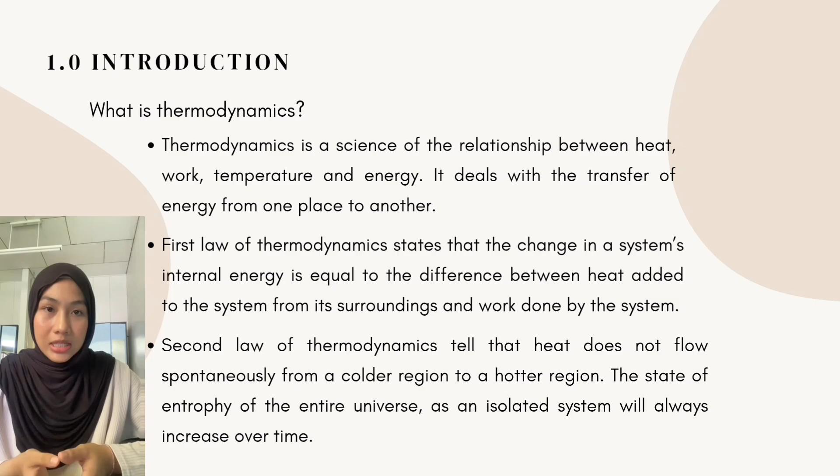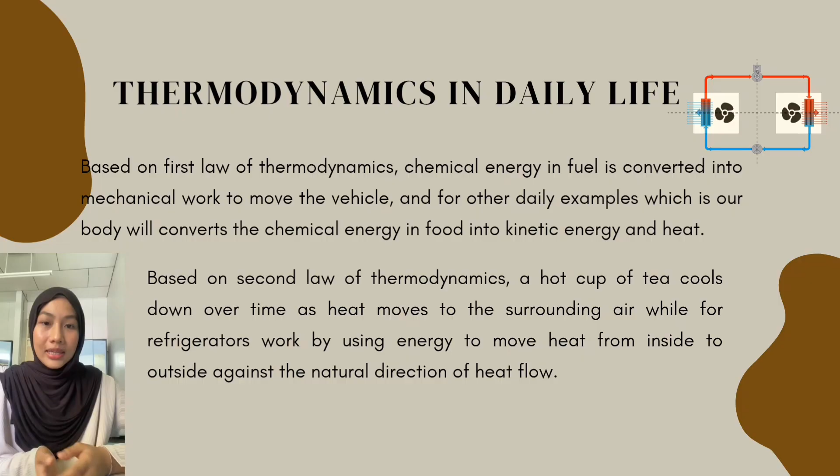So what is thermodynamics in our daily life? For the first law, chemical energy in fuel is converted to mechanical work to move vehicles, and another daily example is our body, which converts chemical energy, the food, into kinetic energy. For the second law, a cup of tea cools down as heat moves to the surrounding air, while the refrigerator works by using energy to move heat from the inside to the outside, against the natural direction of heat flow.

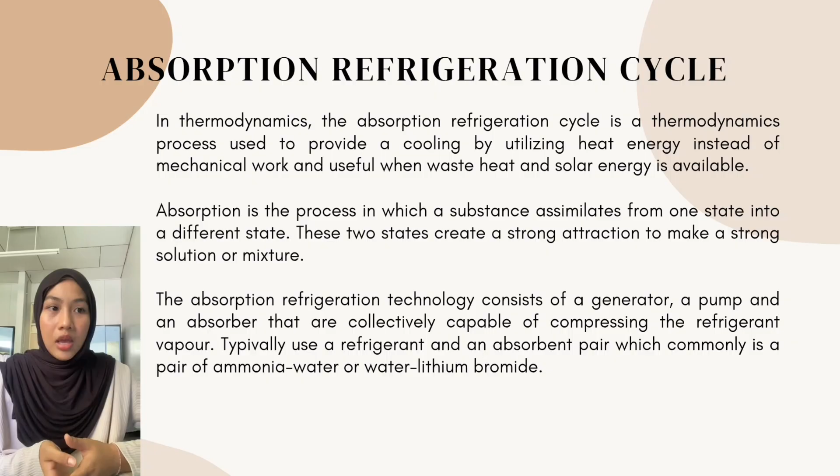Absorption is a process in which a substance assimilates from one state to a different state, and these two states create a strong attraction to make a strong solution or mixture. The absorption refrigeration technology consists of a generator, a pump, and the absorber that are collectively capable of compressing the refrigerant vapor. Typically, they use a refrigerant and absorbent pair, commonly ammonia-water or water-lithium bromide.

The absorption refrigeration cycle in thermodynamics is a technology introduced to address a serious issue. It utilizes thermal energy rather than mechanical work to drive the cooling process. It involves the refrigerant and absorbent with heat from a low-grade source, causing the refrigerant to evaporate and condense. The absorption refrigeration cycle has low energy consumption, as absorption cycles typically require less electrical energy than the traditional vapor compression cycle.

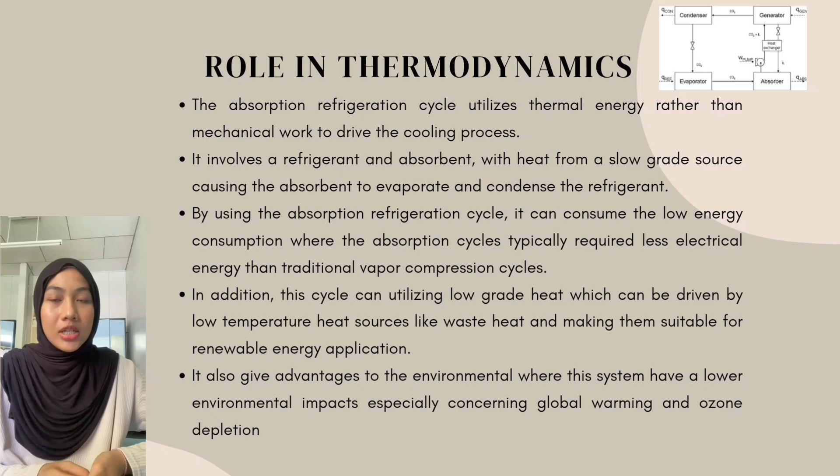In addition, this cycle can utilize low-grade heat, driven by low-temperature heat sources like waste heat, making it suitable for renewable energy applications. It also gives an environmental advantage, where this system has a lower environmental impact, especially concerning global warming and ozone depletion.

Process of the absorption refrigeration cycle. Usually, in the absorption refrigeration cycle, we use ammonia. Ammonia is a refrigerant that gives the cooling and refrigeration effect. Then water acts as the absorbent. Water has a strong affinity towards ammonia, so the ammonia-water solution is formed and used to run the vapor absorption refrigeration process. What is refrigerant? Refrigerant is a heat carrier fluid with latent heat properties to increase performance.

The first process for this system is evaporation. The low-pressure liquid refrigerant enters the evaporator, where it absorbs heat from the surroundings and evaporates. Then is absorption. In this stage, the refrigerant vapor coming from the evaporator is absorbed by a liquid absorbent. Next is condensation. The refrigerant vapor, after being separated in the generator, is passed to a condenser where it loses heat and becomes a liquid. Lastly is expansion. The high-pressure liquid refrigerant from the condenser passes through an expansion valve or throttle valve, dropping its pressure and temperature.

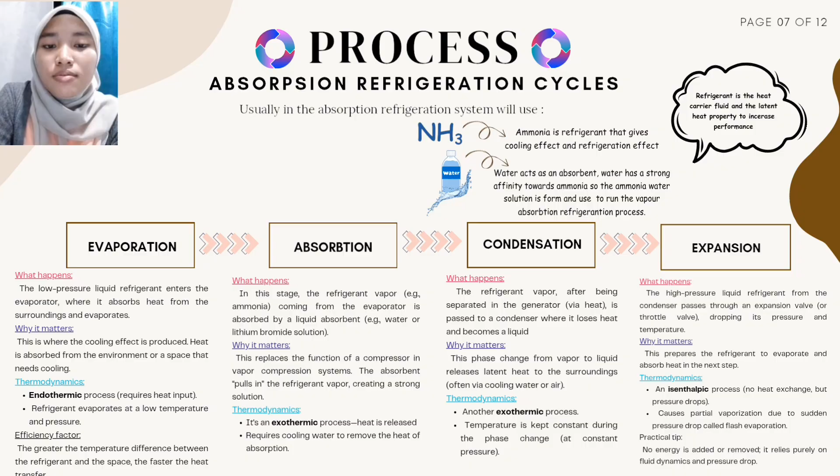Why is this process important? For evaporation, this is where the cooling effect is produced. Heat is absorbed from the environment or a space that needs cooling. Absorption replaces the function of a compressor in the vapor compression system. The absorbent pulls in the refrigerant vapor, creating a strong solution. Condensation is important because this phase change from vapor to liquid releases latent heat to the surroundings, often via cooling water or air. And lastly, expansion prepares the refrigerant to evaporate and absorb heat in the next step.

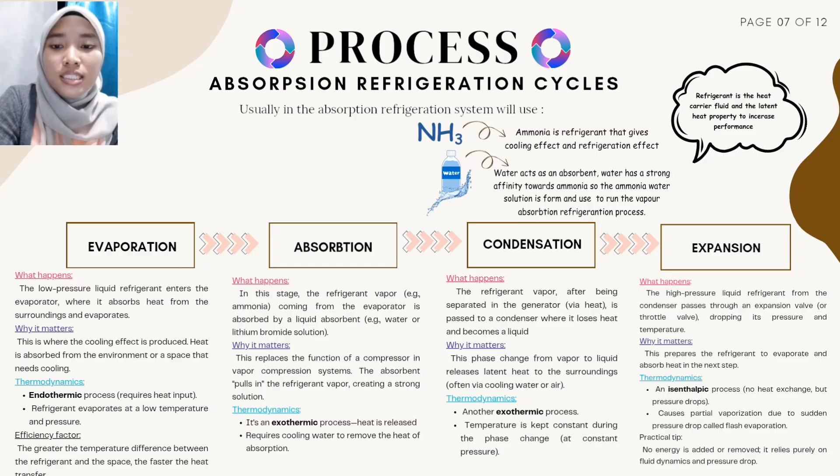I will tell you the thermodynamic process for every process in this absorption refrigeration cycle. First is an endothermic process: the refrigerant evaporates at a low temperature and pressure. This is for evaporation. Next, for absorption, the process is exothermic. Heat is released, requiring cooling water to remove the heat of absorption. Then another exothermic process: temperature is kept constant during the phase change at constant pressure. This is for condensation. And the thermodynamic process for expansion: no heat exchange, but a pressure drop.

For this slide, I'm going to explain briefly how ammonia-water flows in the absorption refrigeration cycle. We start at the evaporator. Here, liquid ammonia evaporates.

It absorbs heat from the refrigerated space, turning into a gas. This absorption removes heat, effectively cooling the space. This step is just like the cooling part of a regular refrigerator.

The ammonia vapor then flows into the absorber, where it mixes with cold water. The water absorbs the ammonia gas, forming an ammonia water solution. This step captures the refrigerant and prepares it for the next cycle. The ammonia water solution is then pumped to a higher pressure using a small pump. The energy used here is minimal compared to a traditional compressor, making the system energy efficient in the right condition.

Next, the pressurized solution enters the generator. A heat source such as gas flame or solar heat heats the solution. This causes the ammonia to boil off and separate from the water. The ammonia vapor now flows to the condenser, where it releases heat to the environment and condenses back into liquid

ammonia. This liquid ammonia passes through an expansion valve, which drops its pressure and temperature, preparing it for the cooling cycle again. The low pressure liquid ammonia then re-enters the evaporator, where it absorbs heat from the space to be cooled, and the cycle continues.

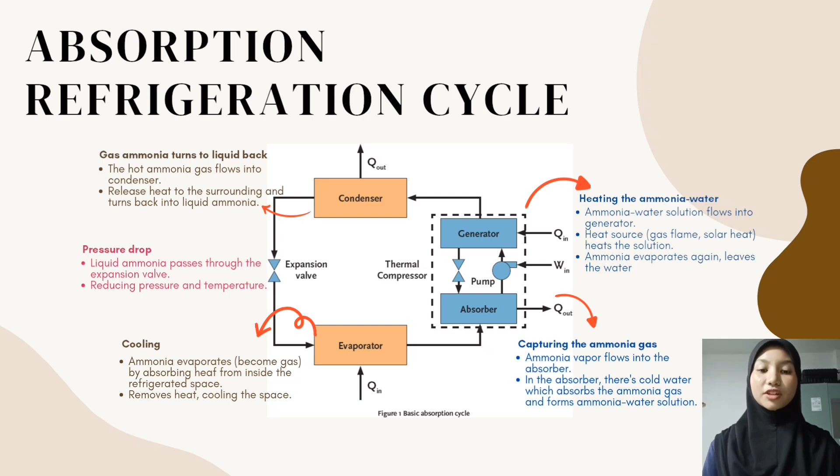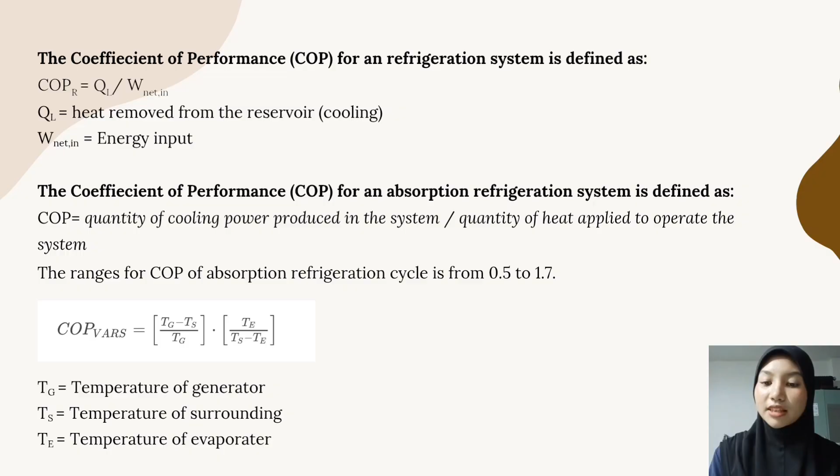The ratio of the quantity of cooling power produced in the system to the quantity of heat applied to operate the system. And the COP for the absorption refrigeration cycle typically ranges from 0.5 to 1.7. This COP varies; this is the formula based on temperature, where Tg is temperature of the generator, Ts is temperature of the surroundings, TE temperature of the evaporator.

Types of absorption refrigeration cycle. First is the ammonia water cycle. Absorption is based on the principle that ammonia vapor dissolves in water, lowering vapor pressure and enabling cooling. The refrigerant is ammonia and the absorbent is water. And second is the water lithium bromide cycle. This uses water as a refrigerant and lithium bromide as absorbent, and it's widely used in commercial HVAC chillers.

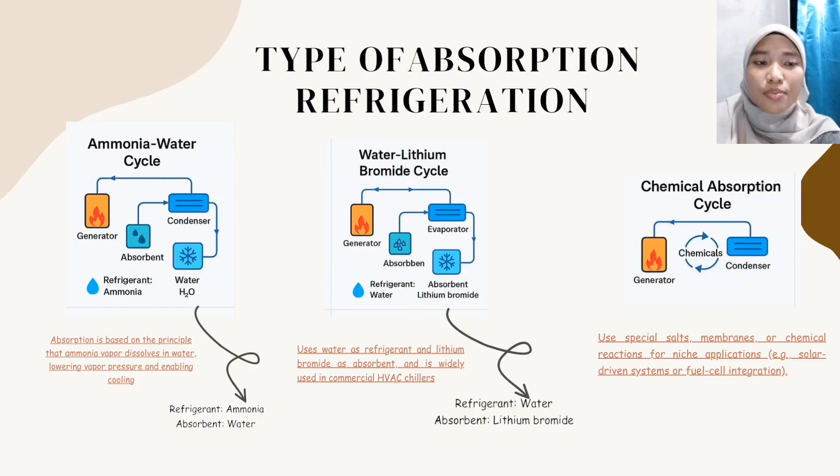And lastly, the chemical absorption cycle. It uses special salts, membranes, or chemical reactions for niche applications like solar driven systems or fuel cell integration.

Application. And for the application, it is used in off-grid refrigeration, which means it is used in remote or rural areas where electricity is scarce or unreliable. It uses absorption refrigeration because it uses heat as its primary input. This can come from gas burners, solar collectors, biomass stoves, or kerosene. The cycle replaces the electrically driven compressor with a thermal compressor involving components like the generator, absorber, and pump. This allows the cycle to function without electricity.

For example, systems such as solar absorption refrigerators, which basically are refrigerators that use solar as their energy source. Other than that, gas-fired camping fridges. Like in the picture, it is a mini fridge that uses gas as its energy. The thermodynamic advantage would be obviously it avoids the need for an electric compressor and uses local thermal energy.

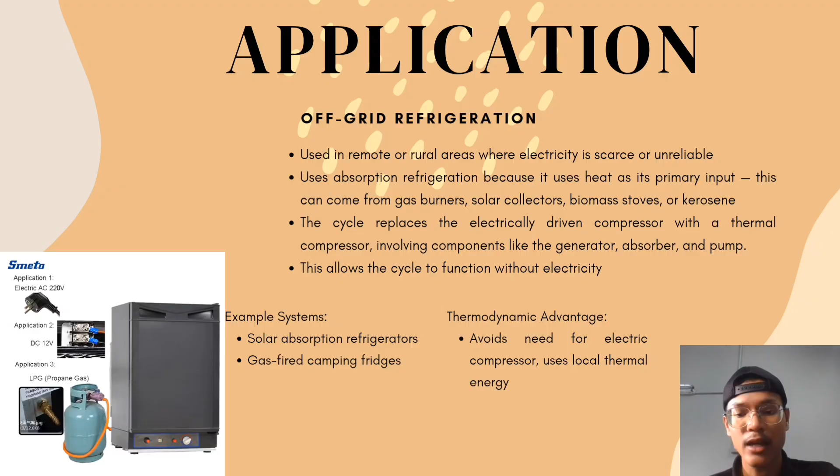Other than that, it is also applied in waste heat recovery. In many industrial processes and engines, waste heat, often low-grade heat, is produced and usually lost to the environment. The absorption refrigeration cycle can utilize this otherwise wasted thermal energy to provide useful cooling, a process known as trigeneration or combined cooling, heat and power, CCHP.

Trigeneration or cogeneration, as you can see in the diagrams, means that when a fuel is used in, let's say, a generator, it will produce two types of energy, such as electrical energy and heat energy. The absorption cycle works efficiently with low to medium temperature heat sources, which are common in waste heat streams. By converting waste heat into a refrigeration cooling effect, overall system efficiency improves, aligning with the second law of thermodynamics, making better use of available energy.

An example of the system would be cooling in industrial plants, air conditioning in buildings powered by cogeneration systems, and shipboard refrigeration using engine exhaust. The thermodynamic advantage would be it converts low-grade waste heat into useful refrigeration.

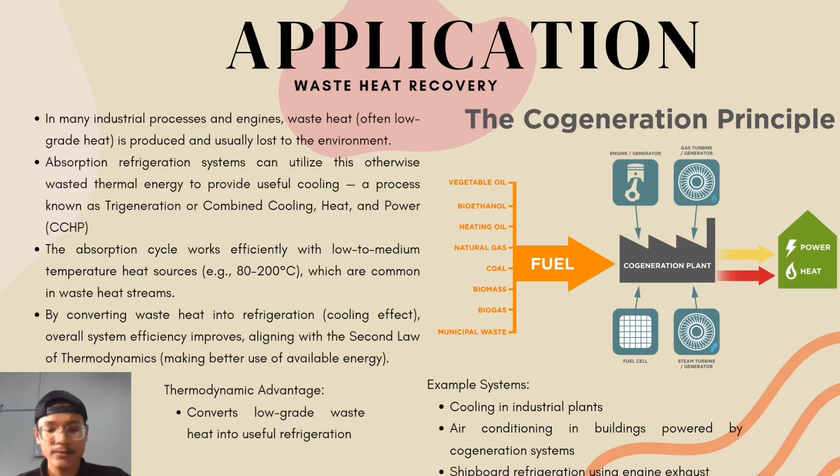And lastly, for the conclusion, the absorption refrigeration cycle is a cooling system that works using heat instead of electricity. It uses a special liquid and gas, such as ammonia and water, to create a cooling effect. This system is very useful in places where electricity is not available, such as remote villages or off-grid areas. By using heat from the sun, gas, or even firewood, the system can keep food and medicine cold without needing power from the electrical grid.

Using off-grid refrigeration has many good effects. It helps people in rural areas to store food safely and reduce waste. It also makes medicine storage easier and supports better health. This system is better for the environment because it uses less electricity and produces fewer harmful gases. It also saves money in the long term because it does not rely on expensive electrical systems.

In conclusion, the absorption refrigeration cycle is a smart and simple way to keep things cool, especially in places without electricity. It is good for the environment, helps people live healthier lives, and makes good use of natural or waste heat.